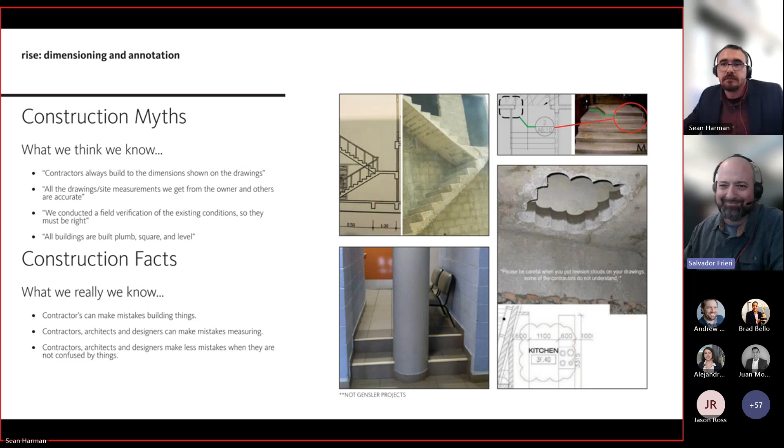And with that, I'd like to kick it over to Salvador for dimensioning methodologies. Thank you. So let's talk about dimensioning methodologies for a few minutes. As you'll hear us say throughout this presentation, this has been put together based on our documentation framework. This document basically provides for us the standards on how and why we should dimension in a particular way.

So why do we need the standards? First of all, to save money and time. Time is money. If we have set standards, we can worry more about what we're doing and less about how we're doing it. That's always huge. And also to facilitate inter-office collaboration. We are one firm, remember? So it is very important if I'm collaborating with somebody in one of the offices in Texas or one of the offices in the region, which happens every single day, then if we're all used to dimensioning the same way, it's going to make that collaboration much easier. So when dimensioning, we must always remember that the task at hand is to communicate the location and size of the different elements that are going to be built, and that we should do it following a hierarchy.

So for example, if we are dimensioning a ground up project, first we start with the layout of the building on the site, and then we move on to laying out the exterior walls, then the grid relative to the exterior walls. We lay out major interior walls and other main features relative to the exterior walls and the grid. We lay out structural elements, columns relative to the grid.

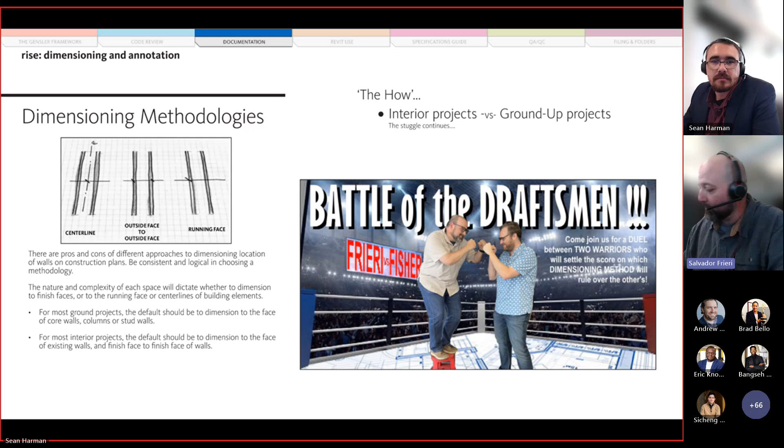So the documentation framework also provides good and bad dimensioning examples to illustrate that we should always organize the dimensions clearly, maintaining consistent reference points, not repeating dimensions unnecessarily, and where to prioritize. We should always remember that dimensioning is one of the prime methods of communication on a project, and it's the key to producing successful construction documents. If done well, it can help the construction process run more smoothly and efficiently, but if done poorly, it can be one of the leading causes for confusion and RFIs. I mean, we measure the success of our CD set through how many RFIs we got sometimes.

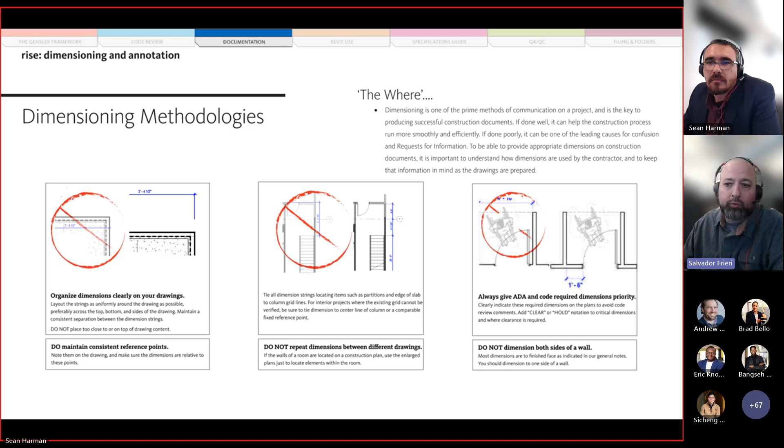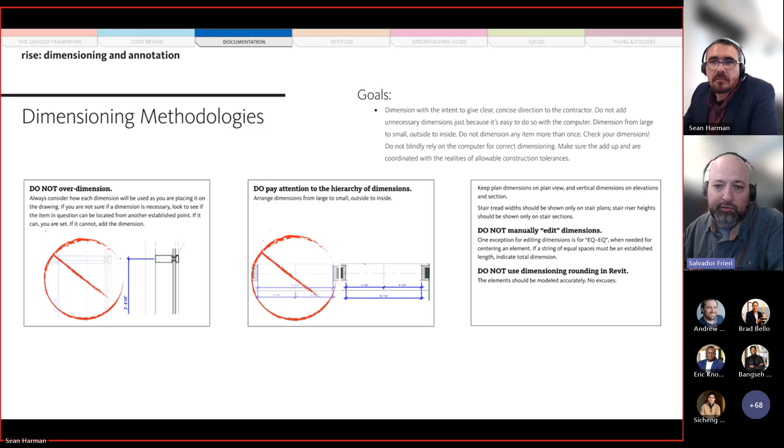To be able to provide appropriate dimensions on construction documents, it is important to try to put ourselves in the situation of the contractor and to keep that information in mind as the drawings are prepared all the time. Next, please. So the documentation framework also reminds us to not over-dimension, to pay attention to the hierarchy of the dimensions and to model correctly, avoiding the need for manually editing or rounding dimensions. We should remember that the goal is to give clear, concise direction to the contractor. Next, please.

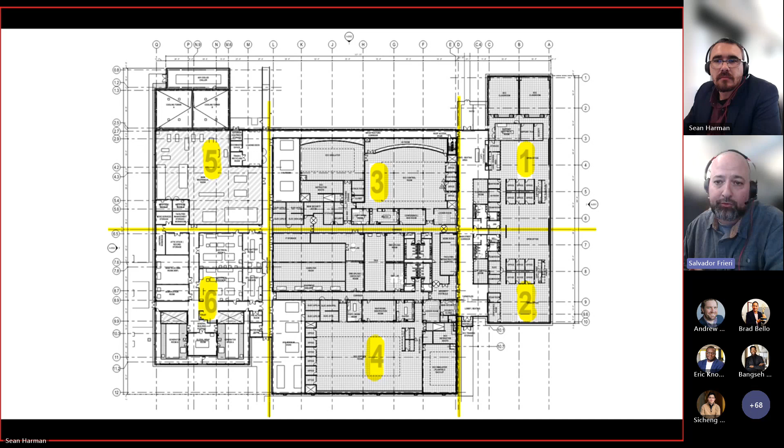So we brought in a couple of examples from three different projects. The first one is a ground up project, and as you can see, it is a large floor plan. So the first thing we did is we divided it into 6 zones, but in the general construction plan, we are providing the dimensions for the grid lines. Those are the only dimensions that we're providing here. Then in the next page, please, you can see one of these enlarged sections of the floor plan.

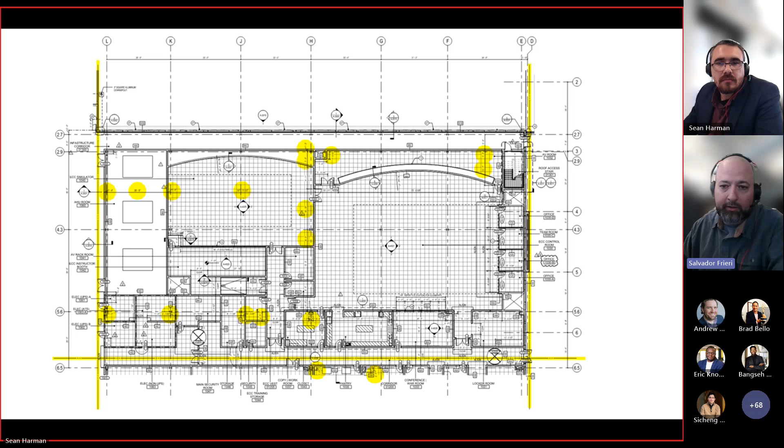The lines are the match lines, and then we've highlighted the dimensions that are referencing the grid lines. So as you can see, a lot of the dimensions reference the grid lines. So this document was following the hierarchy that we discussed before.

In the next example, we have a project where the scope was for an interior fit out. So it was an existing building. We do a lot of this work, of course. And what we want to highlight here are two things. First of all, the enlarged plans that we had to call out because we felt that at this scale, an eighth scale, the information provided was going to be confusing if we tried to fit all of the dimensions and tags in those spaces.

So as you can see, there's a lot of callouts in this plan. And within those callouts, there's only sheet notes. There's not much else, and that's the way it should be. If you are doing a callout, then you should put all of the relevant information in that enlarged plan. You should try to keep the information here only to the spaces that have not been called out.

In yellow, we want to highlight all the alignments that we're showing and dimensions that have no numbers that are equals. So that is very important because it shows what the design intent is and provides the GC clear direction on where to begin laying out the walls.

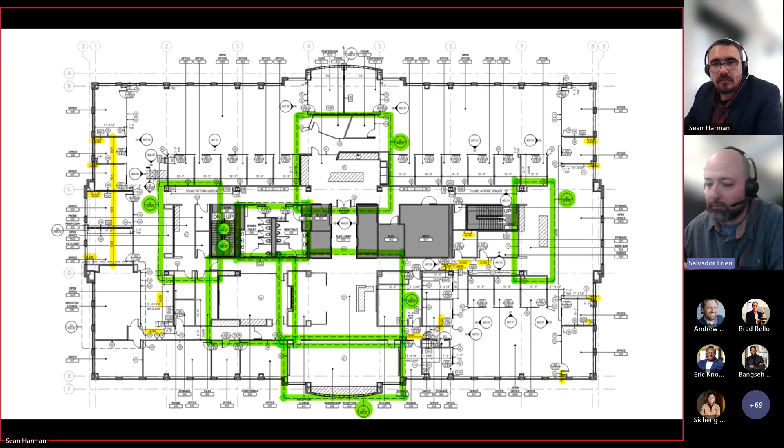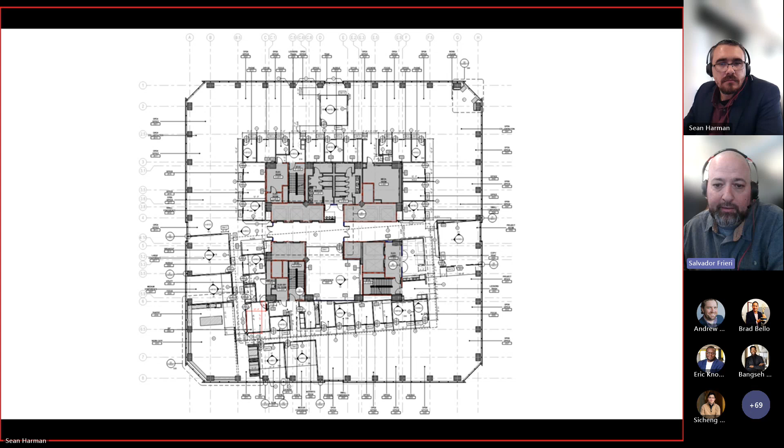And with that, we're going to talk a little bit about annotations. Brad? Thanks, Salvador. Appreciate it. From the dimensioning, we will dive into annotations. So what are drawing annotations? Well, drawing annotations convey critical information about the project that graphic information cannot. They are the link between the drawing's quantitative information and the specification's qualitative information.

So drawings generally describe location. Tools like dimensioning, as earlier described, assist in explaining where things are located within the project. Size and form, defining the shape of the elements and assemblies that are to be created. Dimensioning and annotations help convey this information. Quantity, which is pretty straightforward, graphically or noting quantities, ensure more accurate construction through the drawings.

And relationships between assemblies, whether between materials or full assemblies. The drawings clarify how the fundamental building blocks are blended together into a cohesive work of architecture and interior design, from the placement onto the site down to the final finished application. Other generic information is also included, basically other miscellaneous notations that help clarify the drawings.

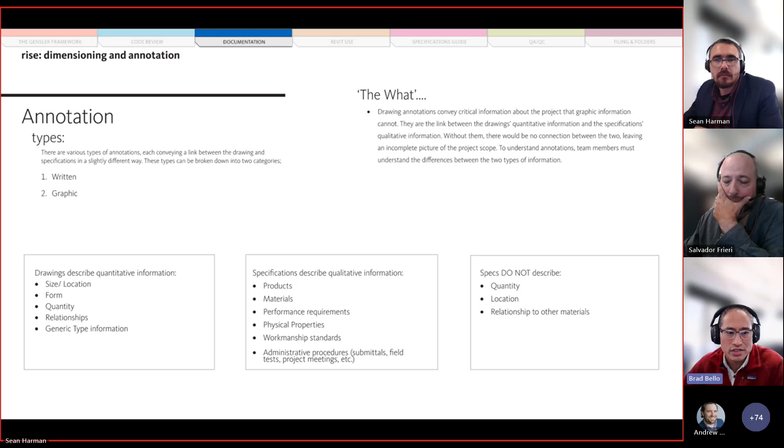For our purposes here, we'll focus on the annotations in the drawings and leave specifications for another presentation. Annotations in drawings come in two fundamental categories, written and graphic, as shown on the screen. We'll continue our presentation with written annotations first. Written annotations are generally categorized by the following: text notes, keynotes, project information notes, general notes, and schedules.

Starting with text notes. The text notes are elements on a drawing that are used to provide information to identify the drawing's graphic representations and/or instructions concerning the use of the drawing or execution requirements for the work that are not otherwise specified. It's quite a run-on sentence. They're usually keynotes or notes directly on the drawing.

An example of a text note can be seen on the detail on the screen that shows things such as existing slab or centerline transition strip and door. These help provide clear information to complement a particular drawing. Keynotes are used to identify graphic representations of project elements and directly refer them to the specifications. Keynotes identify general section and material references from the specification section.

So looking at the drawing example once again on the screen, the Gensler keynote system is applied to provide simple, clear, and consistent information meant to bridge the drawings over to the specifications. So if you are not familiar with using the Gensler keynote command in Revit, then you can check out the Gensler article that's located in our database. But to summarize and refresh everyone's knowledge, the Gensler keynote system can automatically tag components within a Revit detail.

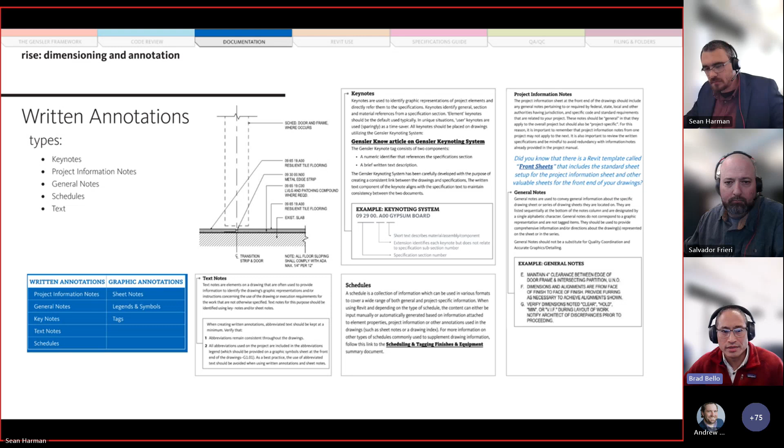So going into graphic annotations. Graphic annotations are generally categorized by the following: sheet notes, legends and symbols, and tags. Sheet notes are numeric symbols used to identify, inform, and provide direction about the drawing's graphic representations, usually without direct reference to the specs. These notes are created during the development of the construction documents, and just as described, provide a little more clarity and direction where graphic representations cannot.

Gensler developed the Sheet Note Manager in Revit, which helps manage these sheet notes into a single database per project. This program helps prevent accidental cross-referencing between notes and numbers. The Sheet Note Manager, as some of you may know, can be a little bit fussy at times, but if the project team is aware of the application from the beginning of the project, then the Sheet Note Manager can work for you more than against you.

Often when a conflict occurs, it's usually because a sheet note accidentally received multiple notes, or multiple sheet note tables are getting applied to a single sheet. So these are a couple of examples where the Sheet Note Manager will help identify some of those conflicts. Be sure to coordinate with your team, though, at the beginning of the project as well as during the project when using the Sheet Note Manager.

The middle table, talking about legends. Legends define graphic symbols that are used to identify elements and materials shown on the drawings and provide additional information about them. An example shown on the screen organizes and explains the basic construction symbols for a construction plan. So in this case, the legend is noting the graphic representations for wall types to make it clear, as well as a line style signifying any fire ratings within these walls.

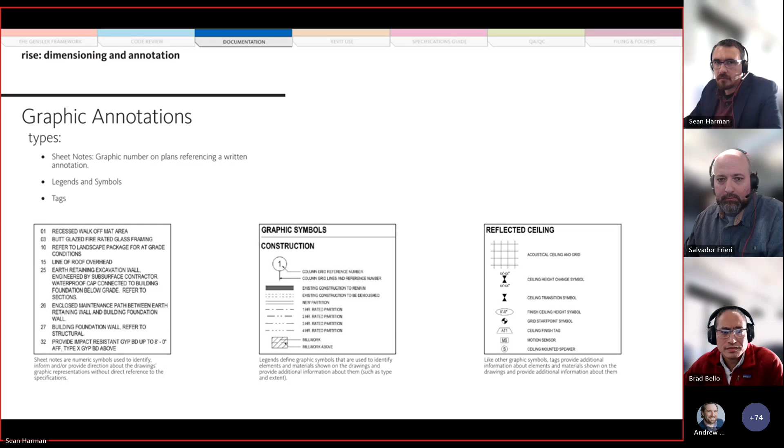So let's go ahead and move on to scheduling and tagging for finishes. There's definitely one example here when we talk about scheduling. As design decisions are made, finishes are selected, reselected, revised, and finalized. So how do we typically note these in the drawings? Starting on the micro level, we have the finish code.

Gensler has a standardized system of unique identifiers for the finishes in the project. The standard format for finish codes is 2 letters followed by 2 numbers with no dash in between. To view the firm-wide standards for these 2-letter codes, please refer to the firm-wide finish code list.

The numbering portion has a little bit more flexibility. You can group the numbers based on location or type within a material, or just start at number 01. It's up to each team to determine the clearest and most logical way to organize. However you decide to set your finish codes, please do so as a team and as early in the project as possible to prevent confusion or lost time due to code reorganizing.

Placing the finish tags on the drawings. Another decision to be made near the beginning of the project is how we actually model finishes in the Revit project, and how the finish tags will operate within Revit.

So there are usually two main schools of method in terms of finish tagging in a Revit model, particularly with the wall finishes. The first and more old school way involves inserting a pre-coded tag into the drawing and manually indicating where this finish is located. These tags do not extract any information from the component itself that they refer to, but rather rely on the users, the project team, to label where the finishes are located.

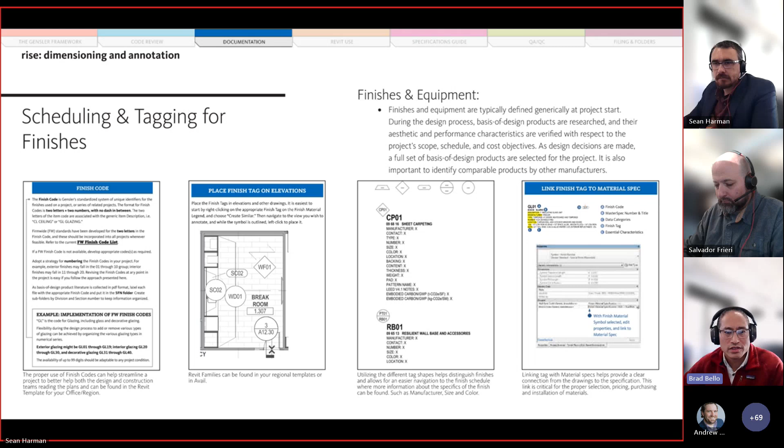So now let's bring back Salvador. We'll talk a little bit about doors. Thank you, Brad. So now we're going to talk about door types and door tags.

All projects are required to have detailed information about door types and frame types. Also, all projects are required to have included a door and frame schedule. All doors in scope should be shown on the schedule, even doors that were existing to remain. If we're changing one small aspect of the door, if we're painting it, if we're changing part of the hardware in it, then it has to be included on the door schedule. Door and frame schedules are intended to provide the basic requirements for each opening. Door numbers, types, and hardware sets should all be indicated here.

The documentation framework provides guidelines that explain how the information is to be distributed among the door type elevations, the door schedule, and the door details. Door types are intended to illustrate basic profile only. Materials, finishes, and dimensions should be represented in the door and frame schedule, not on the door type. Some examples are shown on the rectangle on the left. The Revit template has a variety of common door types that can be edited to suit each project. Now, the documentation framework also explains how to read a door type, as it will give us a better understanding of what is needed to be conveyed by these basic elevations.

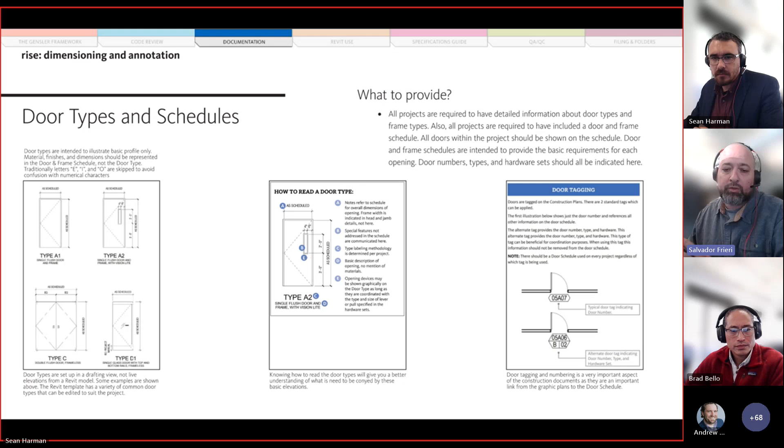With regards to the door tags, these, of course, are located on the construction plans. There are two standard tags which can be applied. We typically prefer to use the larger one because it makes it easier to understand the requirements for each door, because it not only provides the door number, but also the door type and the hardware set. And thus, it minimizes the need to flip through different sheets to understand exactly what's the difference between this door and that door, for example. Next, please.

So the documentation framework explains when to provide what information and at what stage. For example, at schematic design, all doors and swing direction should be located on the plans. We shouldn't have any rooms without a door, of course. The door schedule and door type schedule are not typically required in that early phase. But when we move on to design development, we should make sure that all the doors are numbered. Typically, we'd like to number the doors with the same room number. And if one room has two different doors accessing it, then maybe we can put the suffix A or B or C on those door numbers.

All doors should be numbered with door types identified, size and material of the door, and door frame identified, and any required door ratings identified and coordinated. This is all during the DD phase. We should draft the door schedule with design intent. And then during the CD phase, we must have fully coordinated door types and door schedule included with the drawings and coordinated with the specifications and egress plans.

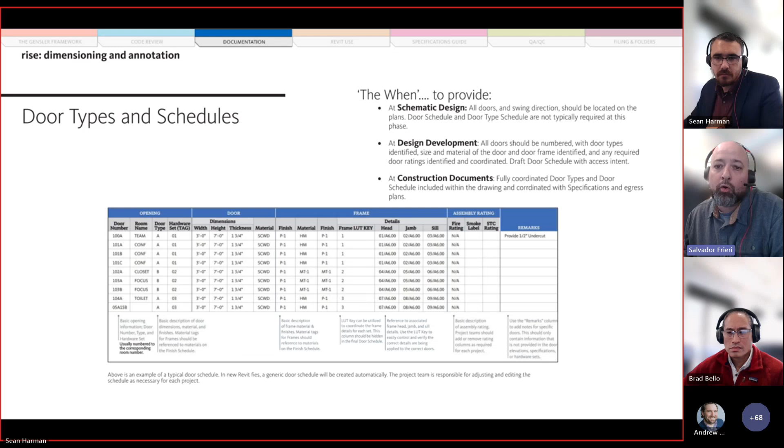It's also very important that the schedule supplies the assembly rating, whether it's fire, smoke, or sound transmission. And also there should be a space for remarks, which can simply be a phrase, or you can place a sheet note there as well.

And that is it for doors. All right, thank you, Salvador. So moving along on our documentation framework, the partition systems. So there are three key parts of the partition systems. There's the details, the schedules, and the partition type modeled elements.

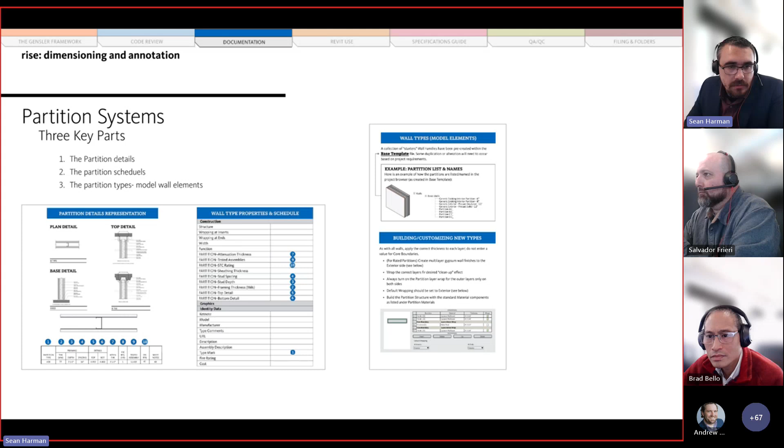So as you can see in the schedule, it is directly related to the wall type properties in Revit and should be controlled here in the modeled wall configuration. The partition. So in the schedule below, the 1 through 10, you can see moving left to right where the partition type, framing, details, attenuation thickness, fire rating, assembly, STC rating, and then sheet notes are all directly correlated to the wall type properties. So in controlling the wall type properties and the makeup within Revit, the wall type should auto-populate into the schedule in this fashion.

As you can see, the partition type sheet, which can be found in the Southeast region template, is comprised of partition details, schedules, and tables, which all combine to help convey all the partitions for the project and how they are to be built. And then looking at the partition tag itself, the first number outside the tag is the fire rating. A second indicator, the first one in the tag, is the partition series, which is made up of 3 parts of the partition. The first part being the first layer, second part being the structure, and the third part being the outer layer. Sometimes left to right could be inside, structure, outside, depending on what orientation the detail is showing.

Letter designations here help distinguish between different partition types and compositions. The third indicator is the structural designator, where the number can be directly related to the actual size of the construction member using the provided tables inside the template. These tables are standard, but can be customized on a project per project basis based on the construction needs of the project, obviously coordinating with your project team on what those indicators represent.

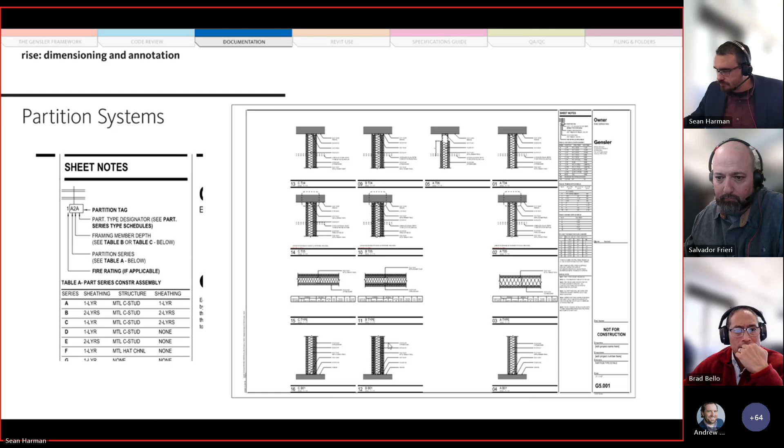Revit tools and support. Well, here at Gensler, we have a support community centered around helping us all document in a consistent manner and help our workflows to be customized. So within Revit, we have a customized toolbar, and that toolbar is filled with tools to help not only streamline the workflows, but also help standardize projects across the firm. So we have set project tools such as Sheet Note Manager, Find and Replace, and others. And we also lean on third-party software such as Ideate and Avail, which can help streamline our workflows. Avail helps us pull in project details as needed very quickly from some of the vetted design details that we have for the firm.